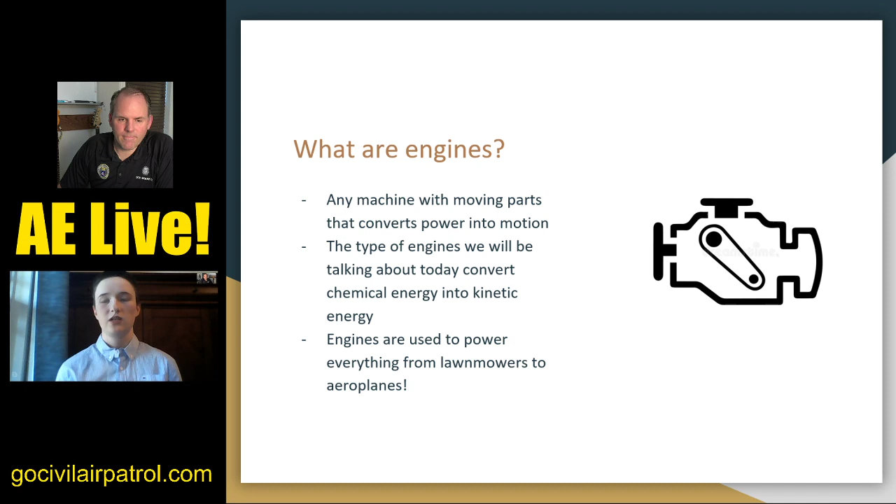I will not be going very in depth and covering all the parts of an engine today. This is a very basic overview. I'm essentially going to be talking about cylinders, the processes that happen inside the cylinder that allow the engine to generate power on a very basic level, and different ways that those cylinders can be configured to achieve different goals with your vehicle. All right, next slide.

Okay, so the type of engines that we're going to be discussing today are four-stroke piston engines. There are other kinds of engines like two-stroke piston engines or jet engines that we aren't going to be covering today, mostly for time constraints or because it's very complicated. So four-stroke piston engines are found in cars and aircraft.

Basically what happens in a four-stroke piston engine is that fuel, so your gasoline, your avgas, whatever it is that you're using to fuel your engine, is ignited or lit on fire to make a small controlled explosion. That explosion then pushes a piston downwards. The piston turns a crankshaft, which is basically just a long piece of metal, and then that rotational motion of the crankshaft is used to move the vehicle forwards by spinning a propeller or wheels, and that is what makes the airplane go.

And the speed at which the crankshaft rotates is measured is in RPM, or revolutions per minute, and that would be the number of times that your crankshaft turns around 360 degrees in 1 minute. You can see that from your cockpit on a little dial there, and you can see that in your car, and that's just something important to note. That's what it means. All right, next slide.

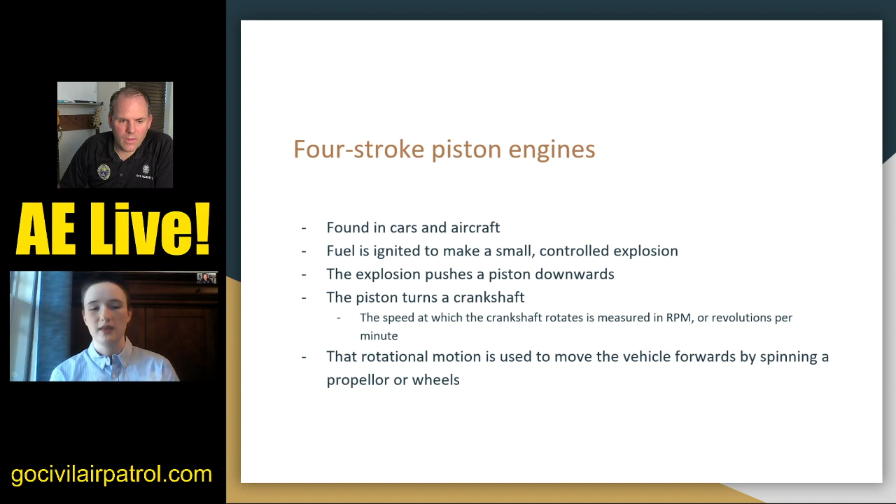Now, the fuel-air mixture is essentially just your fuel, your gasoline, your avgas, your diesel, whatever, that's basically been vaporized and evaporated and is mixed in with the air as a gas. And that process is completed by something called a carburetor, which has just about a million things that can go wrong with it that I'm not going to get into. But that's the fuel-air mixture enters through the intake valve.

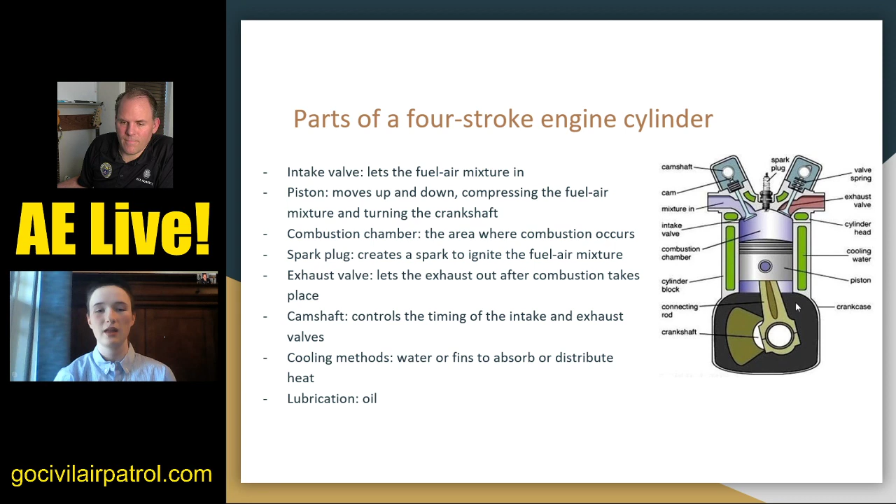Finally, another important aspect of the engine is lubrication. Lubrication is done using oil, and a lot of times that's just as simple as having a pool of oil sitting right in the bottom next to that crankshaft, that black empty space. Sometimes you'll just have oil pooling there, splashing up onto the moving parts to make sure everything's running smoothly and not exploding. All right, that's it for that slide.

The most important thing I want you to take away from this lesson today is the 4 strokes. These strokes are intake, compression, power, and exhaust, in that order. This is just a never-ending cycle, well, until you turn off the engine. It's a cycle that goes around and around, and the part of the cycle that powers the rest of the cycle is the power stroke. The energy generated by the power stroke carries the piston around the other 3 strokes using momentum. So we're going to get into a lot of detail on these strokes on the next slide.

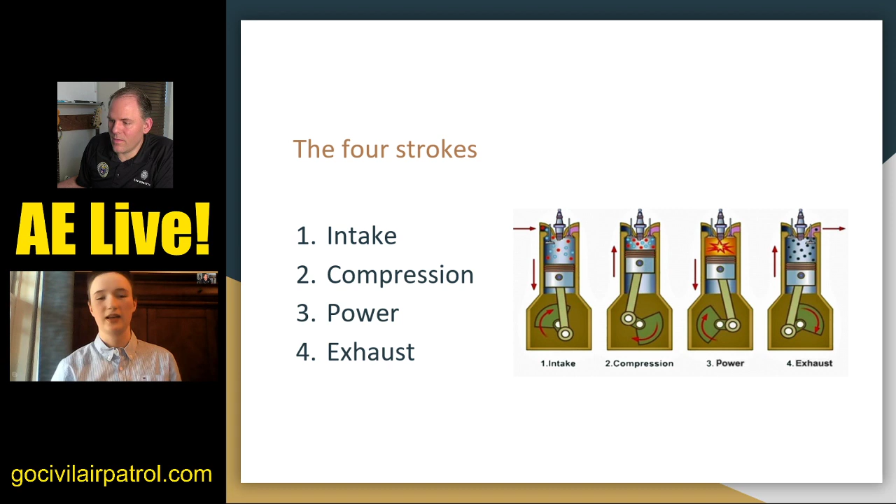So the first stroke is intake. Every time you think about a stroke, I want you to think about a few things. First of all, which valves are open and which are closed. Second, which way is the piston moving? Those are basically the 2 most important things you need to think about when determining which stroke is which and what they do.

In the intake phase, the intake valve is open because we're trying to let the fuel-air mixture enter the cylinder to get ready to burn it. The exhaust valve is closed because we don't want to waste that fuel-air mixture. We haven't used it yet, and if the exhaust valve was open, it would just come in one valve and out the other, and you'd be spitting perfectly good fuel out of your exhaust pipe, which is wasteful and not very effective at all. So whenever the intake valve is open, the exhaust valve is always closed, which is another reason why the camshaft is so important, to control that timing. So in the intake phase, the intake valve is open, the exhaust valve is closed, and the piston is moving downwards.

You might not understand how the piston is moving downwards, what forces are acting on it to make it do that, and I'll explain that later because this is a cycle and we have to start somewhere. As the piston moves downward, it creates a vacuum, because the space it was occupying is now empty, and physics doesn't like empty space or vacuums. So all of that fuel-air mixture rushes in through the intake valve to fill that space, and that's how you get the fuel-air mixture into the combustion chamber.

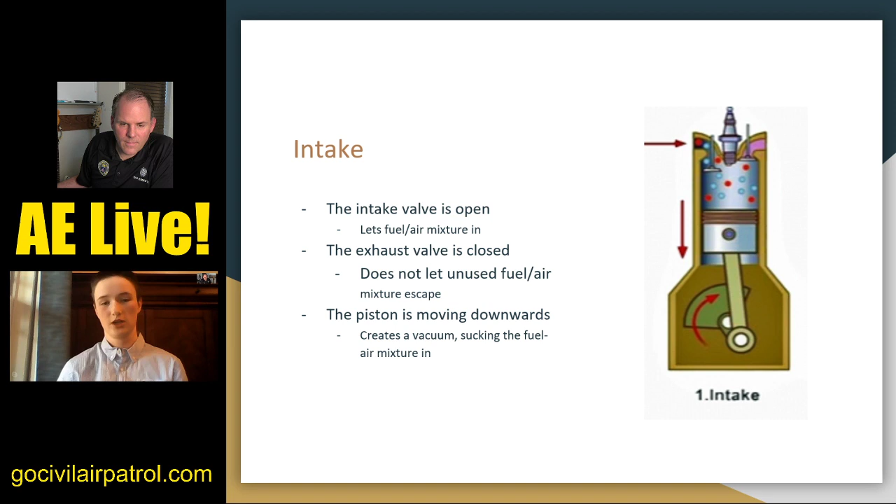Next up is compression. The momentum from the piston going down carries the crankshaft around and back up, so now the piston is moving up. Both the intake and exhaust valves are closed, so the fuel-air mixture is trapped inside the chamber. Just like the name suggests, it's being squeezed and compressed because it's trapped. It can't escape from either valve, and the piston is pushing up on it, the walls are pushing in, and all of those fuel and air molecules are getting closer and closer together.

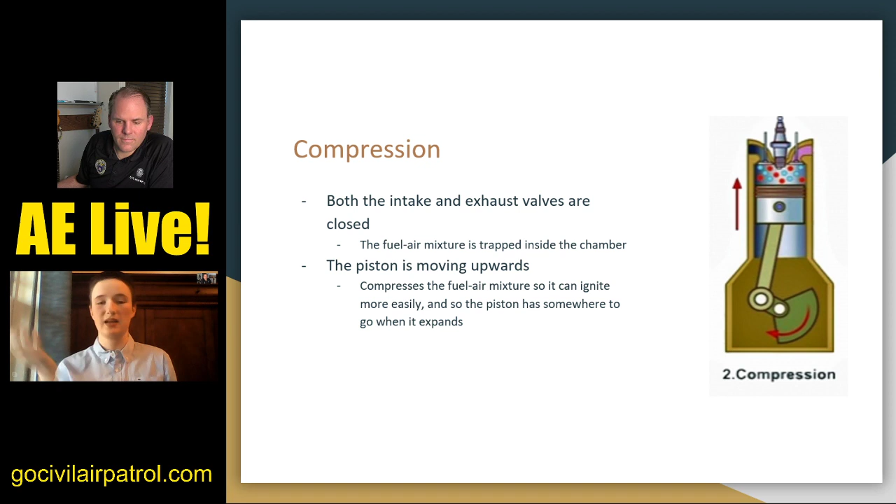The reason we want to do that is because it allows it to ignite more easily, and so the piston has somewhere to go when it explodes. If the piston is at the bottom of its cycle when the fuel-air mixture explodes, it has nowhere to go and won't generate any power. This way we have potential energy, so once we allow that fuel-air mixture to combust, the piston can be pushed downwards, which is our next stroke.

So the next stroke is power, and this is where all of the energy in the engine comes from. The intake and exhaust valves remain closed, and this is very important, because the spark plug is going to create a small spark which ignites the fuel-air mixture. If the intake valve was open during this time, that explosion would travel through all of your pipes and go straight to your fuel tank and blow up your whole engine—it would be a disaster. So again, timing is incredibly important here.

So the spark plug ignites the fuel-air mixture, which then combusts—very controlled, very small. As it explodes, the fuel-air mixture expands, and as it expands, that puts pressure on the piston and pushes it down very forcefully, which then turns the crankshaft. That power, that movement, which is incredibly fast, is what carries the piston through all of the other strokes.

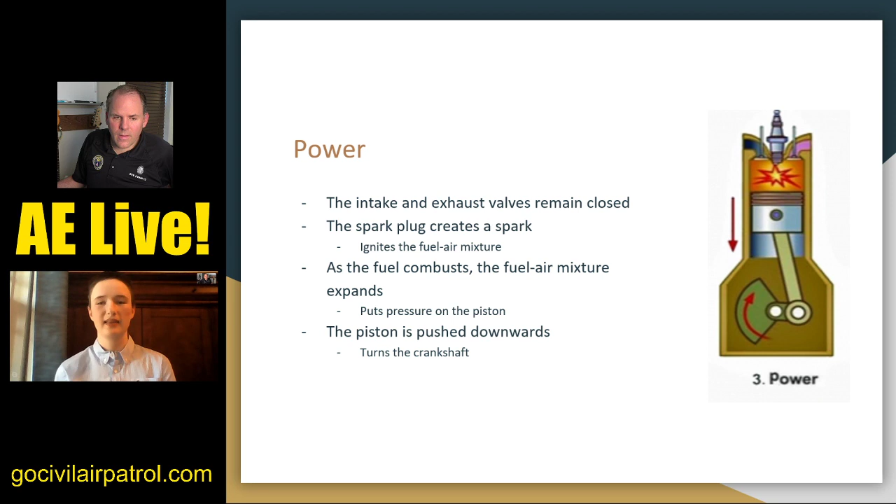As that crankshaft turns, it keeps going in a clockwise motion, as you can see from the arrows in the diagram. As it does that, it moves the piston up and down because of that linkage. So the piston is pushed downwards and it turns the crankshaft, which is what powers the entire engine—your propeller, your wheels, whatever it is. This is the part that actually generates the power the engine sends to your vehicle.

The final phase is the exhaust valve, or exhaust stroke. The exhaust valve is now open, and the intake valve is closed, because we don't want exhaust going back up into our carburetor and fuel tank—that would just build up carbon on the sides of your engine, which isn't good and can cause all kinds of problems.

The exhaust valve is now open, which allows the burnt fuel-air mixture, or exhaust, to escape the cylinder and go through the whole exhaust system. Sometimes there are additional add-ons on your engine that use that exhaust to give you more power, but it can just go straight out the pipe since it's pretty much useless at this point—you just have a bunch of smoke, essentially.

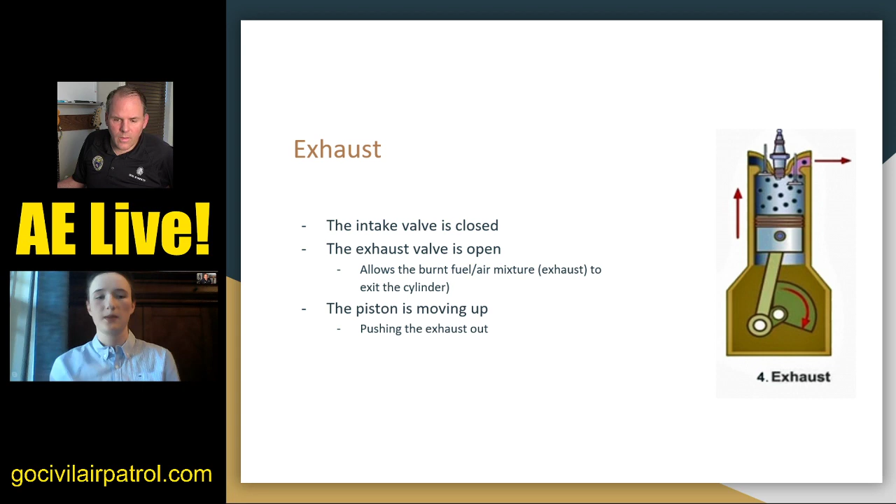And the piston is moving up, being carried around by its momentum from the power stroke, like I said before. Because it's moving up, it's pushing all of that exhaust out of the valve to make sure it all gets out. We're not just waiting for the exhaust particles to float up out of the exhaust valve—we're forcibly pushing them up using the momentum from the last stroke.

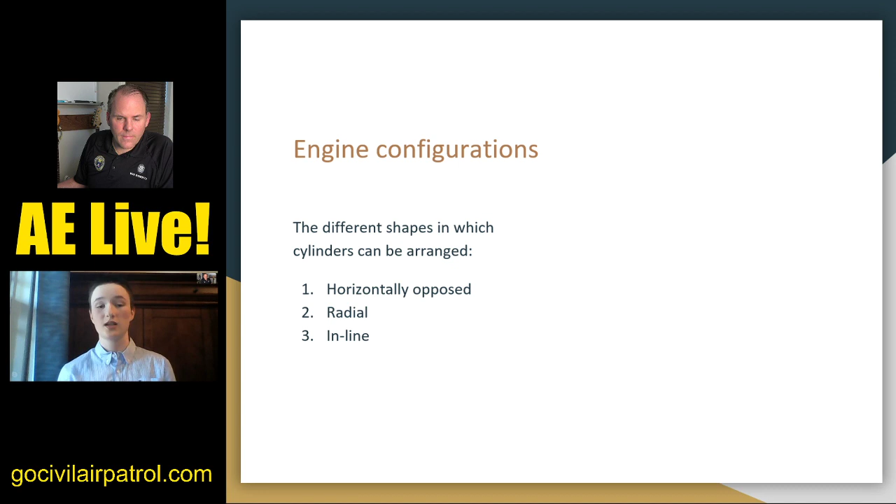All right, so that's about it for the 4 strokes of an engine. Those are very important, and that's basically how engines generate power. But there are a few other things you can do to customize your engine, and different shapes you can arrange these cylinders in, because engines are not just one cylinder. You would not generate very much energy at all that way. There are generally many cylinders that can be arranged in 3 main shapes that I'm going to discuss today.

Those are horizontally opposed, radial, and inline. So the first engine we're going to talk about is the horizontally opposed engine. This is also called the flat or boxer engine. You might see it called that. It's the most common engine used in small aircraft today.

So if you fly something like a Cessna during your O rides, if I remember correctly, a Cessna has a horizontally opposed engine. Essentially what it is, you have two banks of cylinders directly opposite each other, like this, so the cylinders are pointing at each other, kind of canceling each other out in the same flat plane. The crankshaft is in the middle, so the crankshaft would be in between my fingers in this demonstration, and then the pistons push outwards like this. You can see the crankshaft right in the middle there, that little circular thing, and the pistons push outwards towards you, see the little red caps on the end there. That's the direction where the pistons push.

I would find a GIF, but I couldn't get it to work with my presentation, so I just got a picture. These engines are usually air-cooled, and they have an even number of cylinders, because each cylinder on the left side is kind of canceled out by a cylinder on the right side, so you don't have it pushing more in one direction than the other. So you're always going to have an even number of cylinders.

This engine probably has the most advantages out of any of the engines I'm going to talk about today. This is because it has a small frontal area, and this is incredibly important because everything with aircraft has to do with drag. You're always trying to reduce your drag, and this is something I talked about in one of my previous lessons, but just to recap, drag is the force that pulls your aircraft backwards.

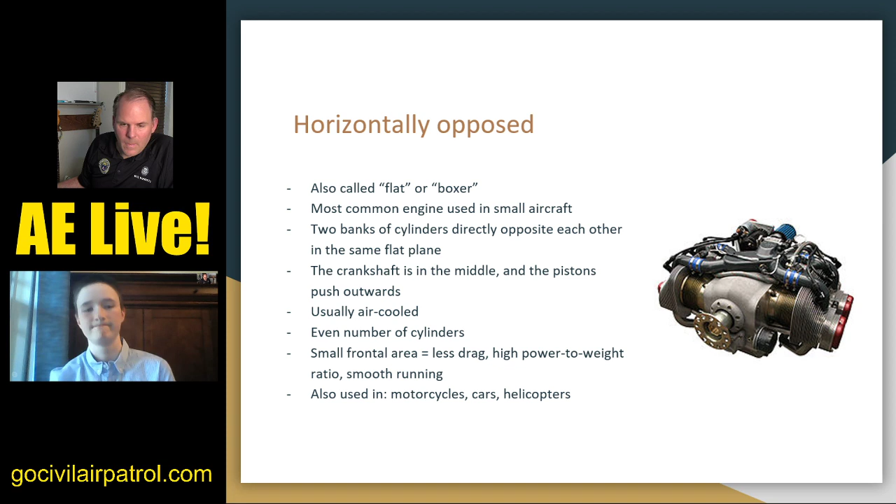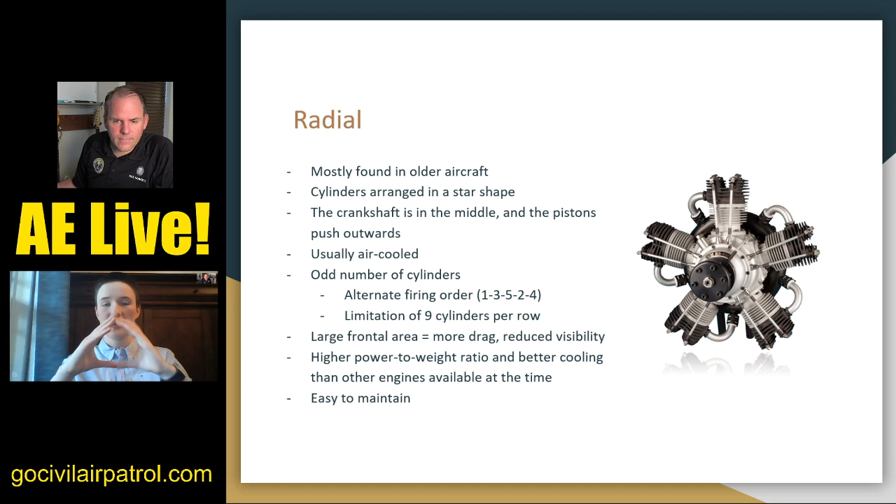With these engines, there's always going to be an odd number of cylinders, because the firing order of these cylinders is alternate. Not all of these cylinders are firing at the same time. It's not like out, in, out, in, it's more like out, out, out, out, out, out. They're taking turns, and the way these work is alternating.

So if we call the top cylinder cylinder 1, and the one just to the left of it cylinder 5, then the firing order actually goes 1, 3, 5, 2, 4. So it's going around, but it's not hitting each cylinder in order, it's hitting every other one, and because there's an odd number of cylinders, it eventually hits all of them. If we had an even number of cylinders, half of them would be completely ignored during this firing order, because we'd end on the same number we started with.

So there's a practical limitation of 9 cylinders per row, because after that it just gets too big. But you can add multiple rows. Imagine it like a cookie, and you stack multiple cookies next to each other since it's kind of round. You stack them next to each other and connect them all with the same crankshaft. That's how you can get more than 9 cylinders in these engines.

The main issue with these engines, unfortunately, is that they have a large frontal area, which is exactly what I was talking about with drag. Because it has a large frontal area, there's a lot more force being put on the air, a lot more impact going on. Because of that, the air pushes back harder, and it negates a lot of the thrust actually being generated by your engine, which is pretty bad.

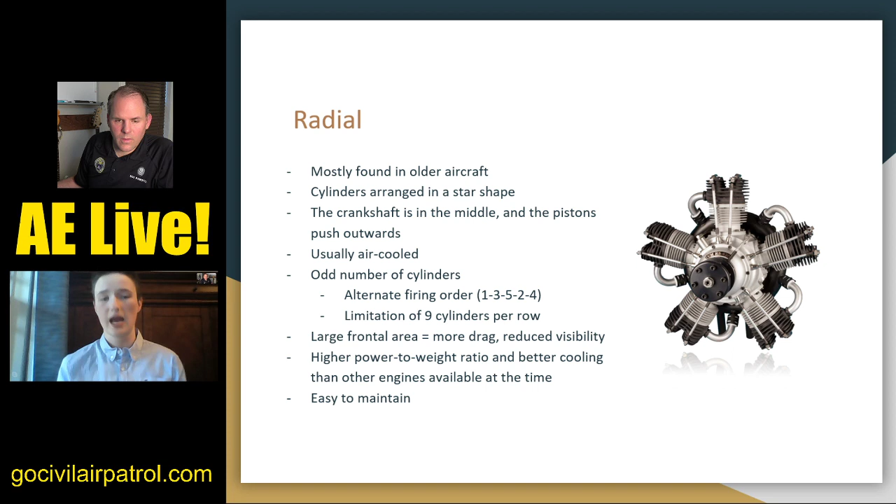It does have a higher power-to-weight ratio and better cooling than a lot of other engines available at the time. Horizontally opposed engines weren't widely available then, and this was really the best option—better than a lot of the alternatives, which is why it was so popular. But now that we have horizontally opposed engines, these are pretty much obsolete.

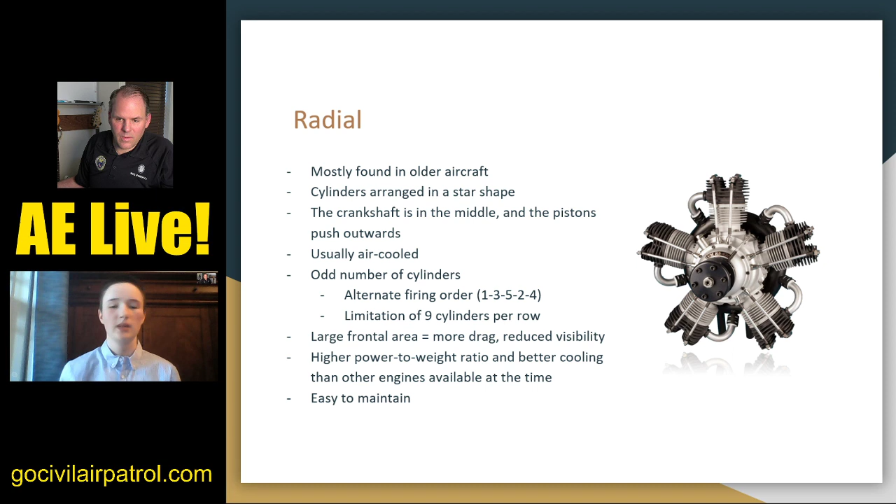The biggest advantage of the radial engine, one that even the horizontally opposed engine can't beat, is that it's incredibly easy to maintain. All of your cylinders are laid out very nicely. Half the time you don't even have to open up the thing to get at it, because the air just comes in the front anyway—it's practically exposed. So you don't have to take apart very much to repair or fix anything wrong with it. Whereas with a horizontally opposed engine, or an inline engine like we'll see later, everything is very clustered together and closed in. So if you want to fix one small part that's gone wrong right in the middle, you have to take apart the entire engine just to get to it.

There's a practical limitation of 6 cylinders, because when you have more than 6 cylinders in a row, the more cylinders you add, the longer your crankshaft has to be to accommodate and reach all of them.

When you have more than 6 cylinders, your crankshaft gets so long that it's very difficult to make out of a material and manufacture in a way that resists vibration while also remaining rigid. Because the longer you make something, the more leverage vibrations on either end have, and they're going to make it snap.

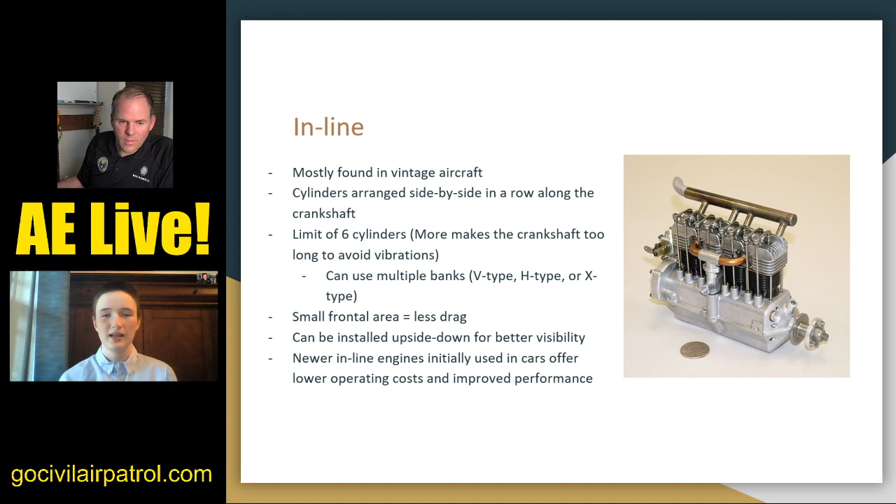And that is it for my engine presentation. Like I said, it was fairly short, but I hope you guys learned something. If you have any questions, just let me know.